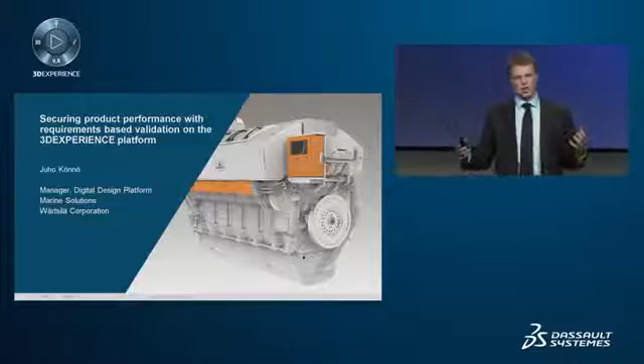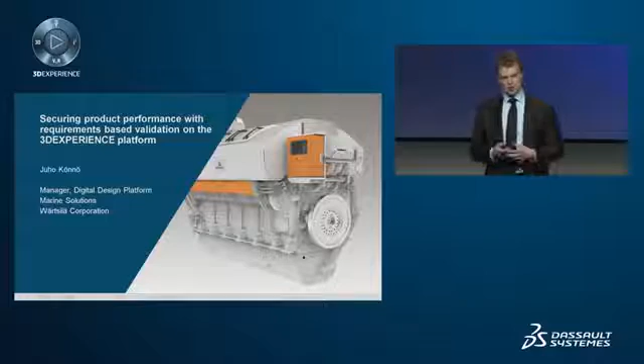Thank you, Sumant, for the kind introduction, and thank you, Dassault and Simulia, for hosting this great event and for inviting me to give some insight into what we've been doing with the platform. We're talking about securing product performance, and what do we mean by that? It's all about meeting the targets with the product design, and doing that with the minimum amount of going back and reiterating. We're going to see how we're using the 3DEXPERIENCE platform to leverage that.

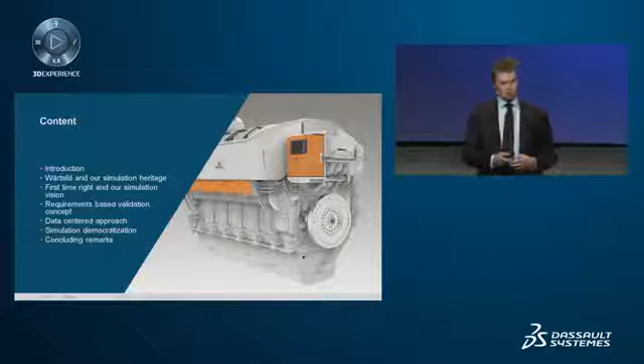So we're going to look first a bit into our company, because I don't think the four-stroke medium-speed diesel is such a mass product that you're overly familiar with. Then we'll take a look at what we actually simulate as background, so you see what kind of simulations we're working with. Then the core of this talk will be more on the requirements-based validation concept—what we mean by that, coupled with the data-centered approach—and going into simulation democratization, showing how the 3DEXPERIENCE platform helps us with that.

But first, a bit about our company. We're roughly 18,000 people in 70 countries, a technology company. We're of course known for the four-stroke engines, but our business nowadays is divided into marine, energy solutions, and services. On the marine side, we're known as an engine manufacturer, but we actually provide the whole deal for the ship—everything from thrusters, propellers, gearboxes, all the way to bridge engines. You can even buy toilet seats for your ship from us.

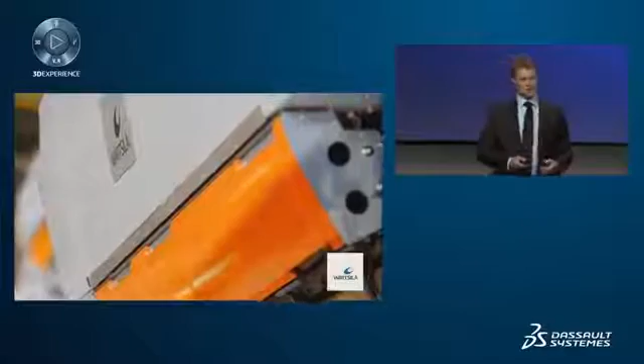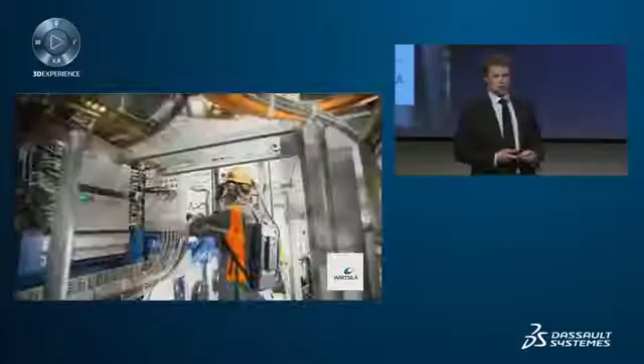Then the other part is the power plant side, or energy solutions as we call it nowadays. It used to be a lot about generating power somewhere you didn't have anything else available, but now it's transforming more into smart power generation—meaning providing flexible power for balancing grids, for example, with wind power coming more heavily into play. The third cornerstone of our operation is the service business. We service not only our own products but quite a lot of other engines too, and we have a really wide service network. That's in brief—I hope that gives a quick overview of who we are and where we come from.

Moving into the topic of the day and more into simulations: back in the 70s it was pen and paper, but already in '73 we did the first finite element analysis. In 1980 we got the first personal computers, and moving into the 90s we went more into hydrodynamic bearing analysis to begin with. Here's actually a connecting rod from '92, so there's happened quite a bit on model accuracy since those times.

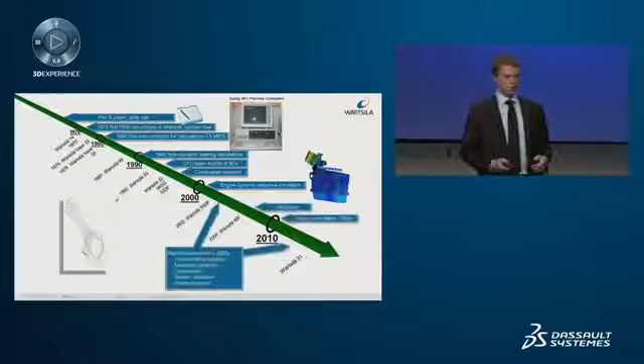Then going on to CFD, we do quite a bit of combustion CFD, for example, and combustion is at the heart of the four-stroke engine, so that's really an important topic for us. Going into the 2000s, we started looking more and more at the whole engine, and during the 2000s we've been rapidly developing both the simulation methodologies and how we apply them—going more into DOEs, optimizations, looking at large data sets, and also making the simulation methodology itself better: multi-body methodologies, advancing finite element models, CFD.

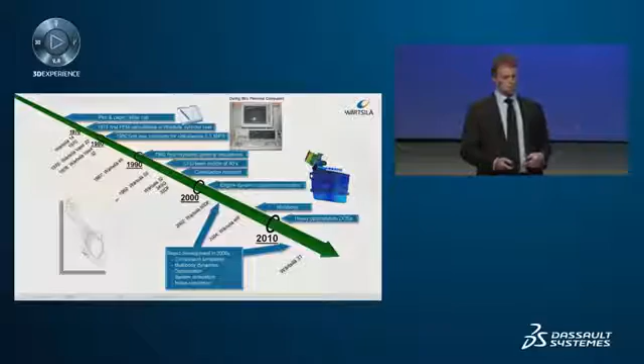What enables us to do this is the massive increase in computational power. We've been steadily investing in hardware, so with a roughly constant yearly investment, you get an exponential growth—in 20 years it's almost a factor of a million that we've gone up in computational power. Then, of course, the software cost starts to dominate, and that's kind of like the resource nowadays, I think, from the cost point of view, because you want to really make sure you utilize your software to the maximum.

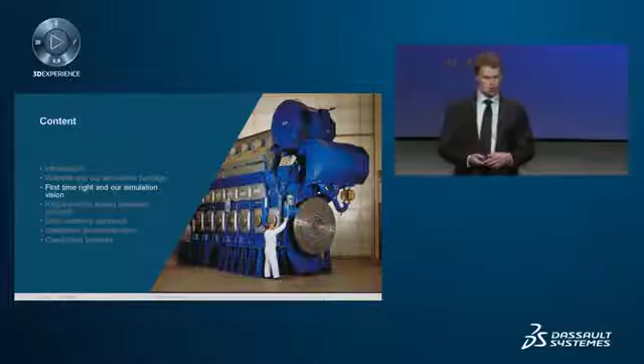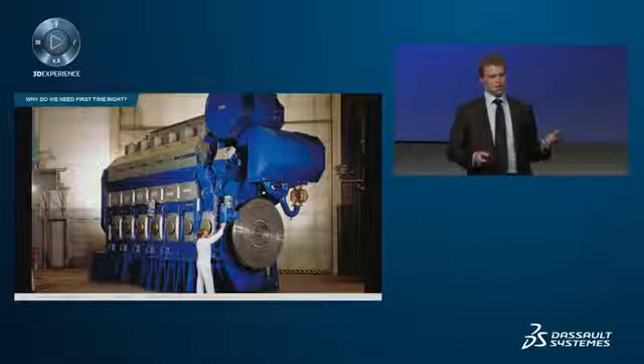Going a bit more into the actual simulations, we're talking a lot about first time right. And that's really connected to how and why we run the simulations. And why do we need first time right? I think the answer is actually in this picture. It's the sheer scale of the products that we're making.

First of all, it's of course the component cost. Big components cost a lot of money, take a lot of time to make. So prototyping, it's really expensive. And the other aspect is, of course, the testing. If you go more into testing-based validation, if you have that nice V8 engine in your car, you press the pedal, there's a small whirlpool going in the tank.

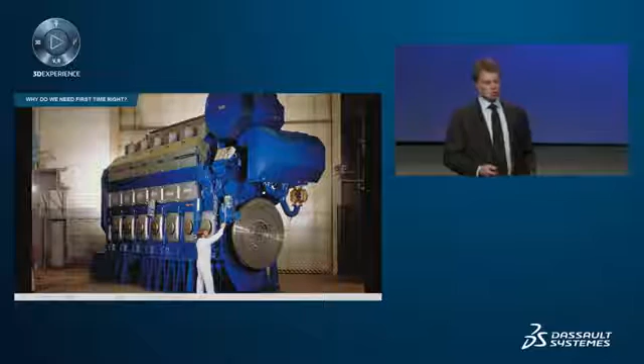Then if you're talking about something like 40, 50, 100 liters displacement per cylinder, the fuel cost is really substantial for the physical testing. So that's been a natural motivation always for us, why we want to promote the virtual testing more and more.

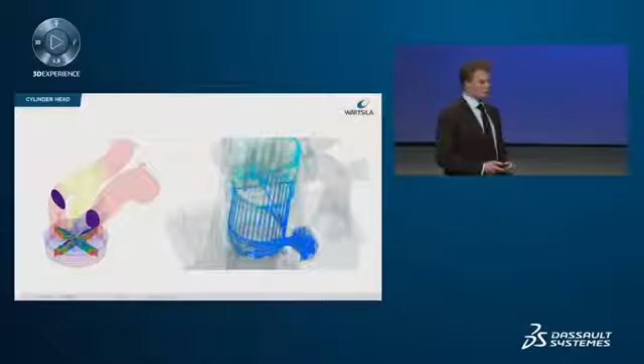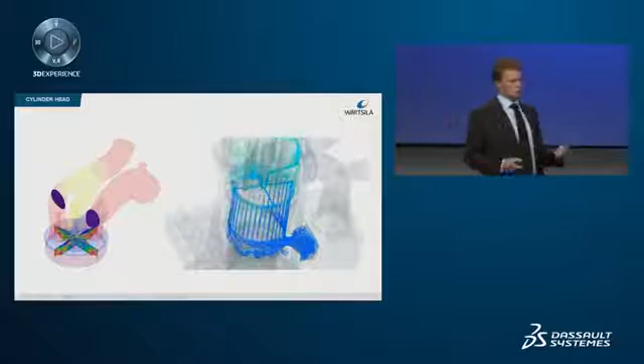Then some practical examples how we do things, and this is to highlight that we're going more and more into this kind of multi-physics setting. For example, for the cylinder head, we typically start from a combustion CFD. We go to a conjugate heat transfer for the cooling. Then from that, we take the thermal results.

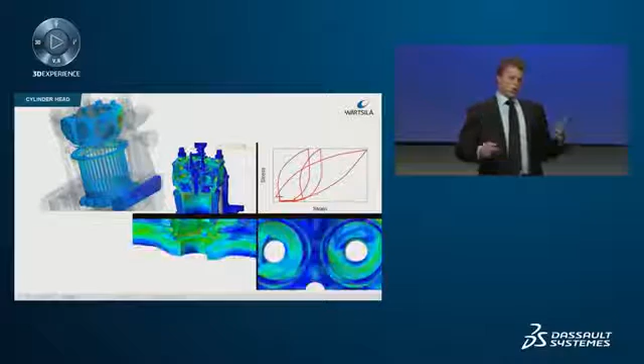We're using Abaqus here for the finite elements. We're using pretty complicated material models. We're also including more and more manufacturing effects, such as the casting effects, what the material actually is in the casting due to the cooling and so forth.

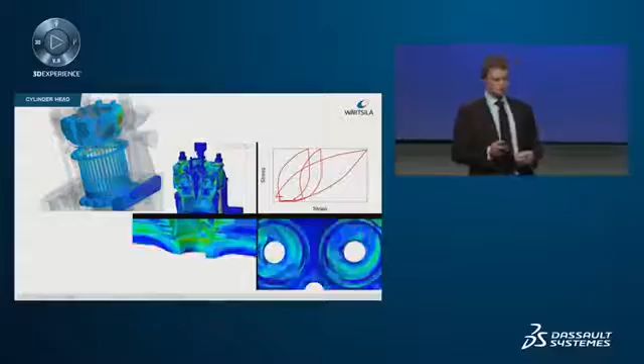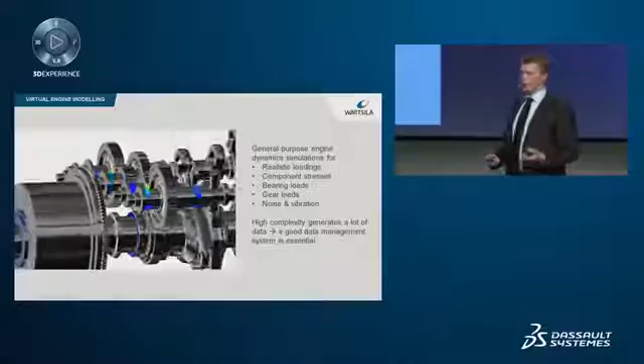Then another cornerstone of our modeling approach is the so-called virtual engine, which basically means multi-body models of the whole engine. So we try to make the multi-body model as complete as possible and to utilize that as much as possible. So it's not only for the vibrations, but you get a multitude of results out. You get oil films, you get loads for other simulations.

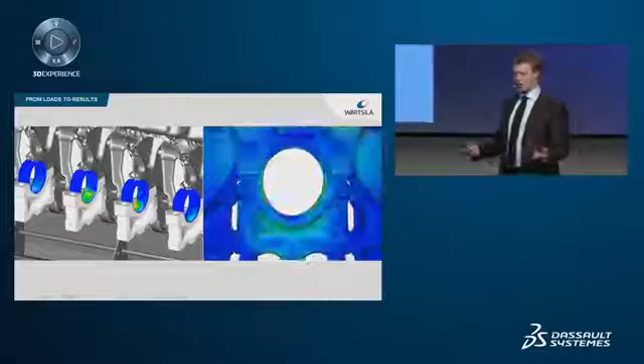And as an example of that workflow, from the multi-body model, we're analyzing, of course, the bearing results. We're taking those loads, transferring those to an Abaqus model. Once again, here we're having casting effects included, a lot of contacts. And because you have big components, the simulations tend to be heavy.

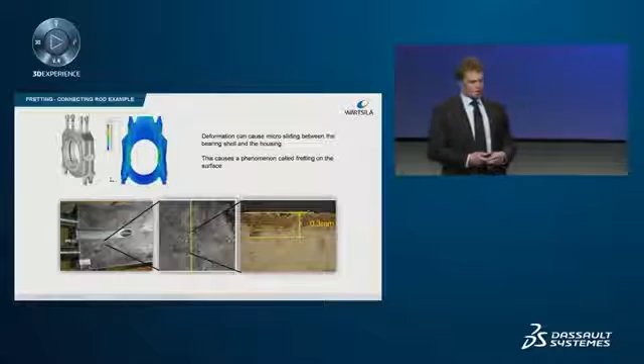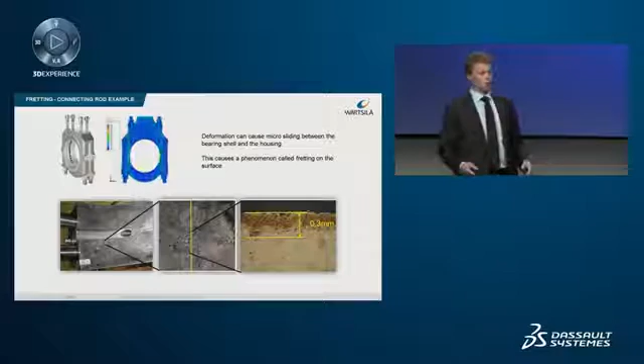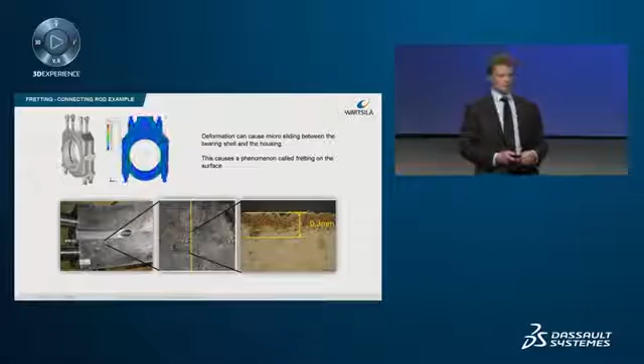And having said that, big components doesn't mean that you're not always looking at everything on the micro scale. I wanted to show this example of the fretting phenomenon, which is really commonplace wherever you have frictional joints. So here basically the connecting rod is deforming from the bottom and you get a sliding between the shell and the housing. And then with innocent-looking stresses, you can get pretty nasty-looking results.

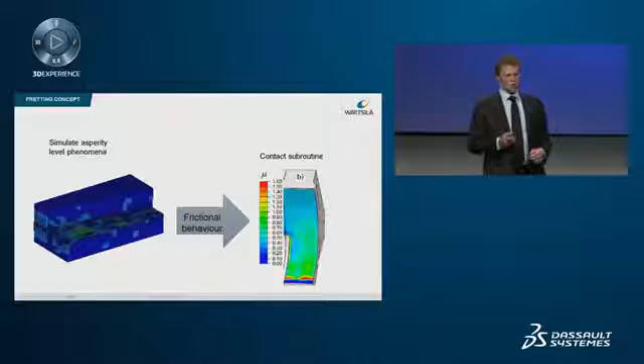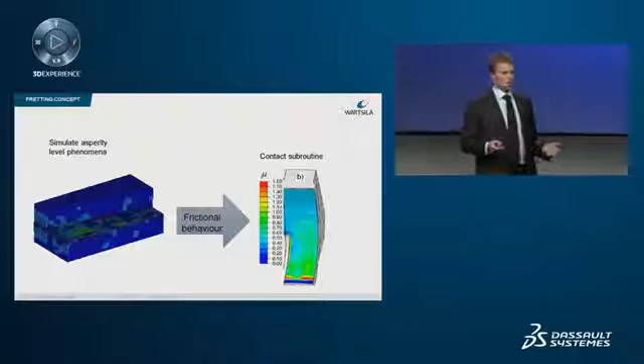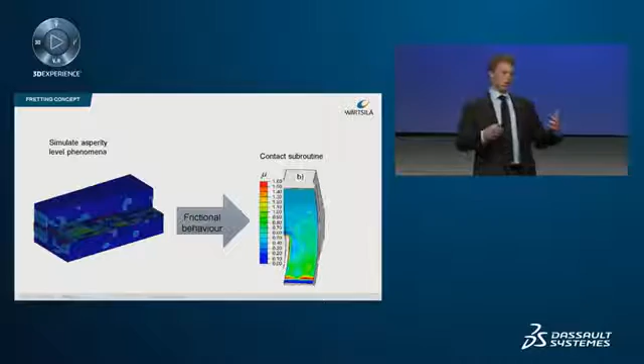And this has led us actually looking into micromechanics. And it's been really nice to see the amount of interest here going towards the multi-scale concept. And we're using here, for example, Abaqus for modeling asperity phenomena and trying to go from those microscale or mesoscale results into something that we can utilize in the analysis workflow.

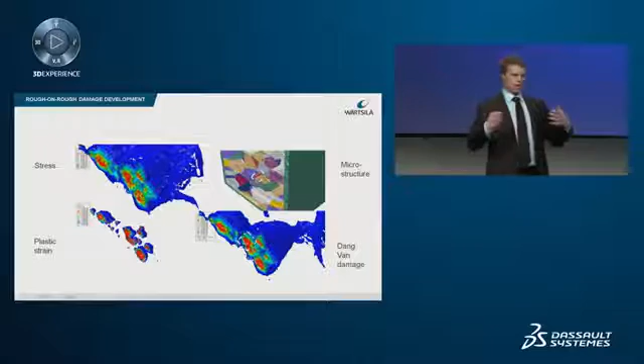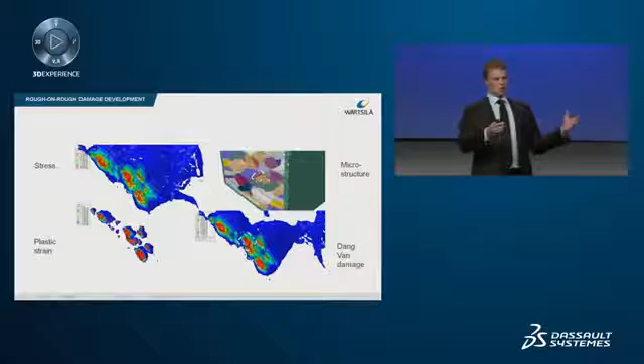And taking that bit further, we are now also modeling the metal itself on a grain level to try to understand what happens in the contact, and then try to take those to the simulations that we're actually running. And from our perspective, we're not trying to reinvent the wheel on the micro level, but our focus has been more on how do we take all of that good stuff that's been done in the micro modeling, and how do we make that into something that we can actually utilize.

So this is why we're so concerned about the requirements, because they are actually the thing that guides us into the general direction of what we are trying to do. And that is why I think it's really important that they should be always visible and accessible to everyone involved in the design process. And the other aspect is that there's a lot of different levels of requirements.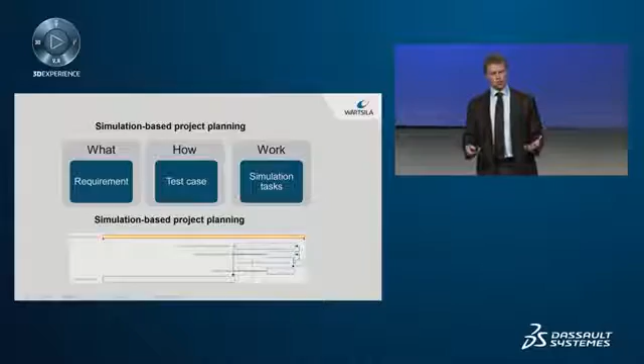In traditional project planning, you start quite often from the work. So we need to do this bit of work, then you put it into a schedule. But I think that in simulation-based project planning, if we want to call it that, we should just simply flip it over. So start from the end. And this is what's actually demonstrated here. So let's say we have a new engine development project.

And we start figuring out what to do. We know that we need to run some kind of analysis once again on the head. So you're starting with the project planning, but now you're starting from the end. So you're not starting with that item that, okay, I need to build the model, I need to prepare the CAD. But we're starting by saying that, okay, in the end, we have to do some design iterations.

But why we're putting that item there is that we are now using the platform once again to use those requirements that we have already existing in that same place. So we start from that task that is going to be the one that delivers your targets. And to that one, we're now linking, for example, the requirements. So these requirements are actually the only thing why you are doing this specific validation task. You're doing it because you want to fulfill the temperature targets.

The next step in this one is then backtracking the track. How are you going to get there? So then you figure out that, okay, typically we need to run 10, 15, 20 designs. So it probably makes sense to create some kind of simulation template, for example, in this case. And we define that as a task. In the same way, we link those tasks, so you need to get the template done before you can start on your design iterations.

And to that end, we're really trying to heavily use these dashboards as a means of reporting interactively, providing access to the data. Like we saw a similar thing in Andy's presentation, the key is that you can provide the data to a lot of people, and you also provide the opportunity to communicate or save your communication. So for example, annotate the designs, say that this is good because of that. Maybe you should be looking into this.

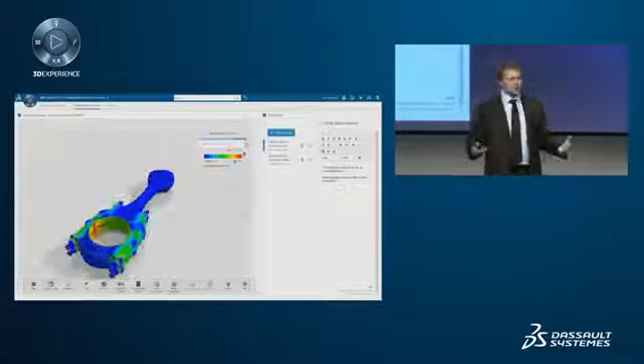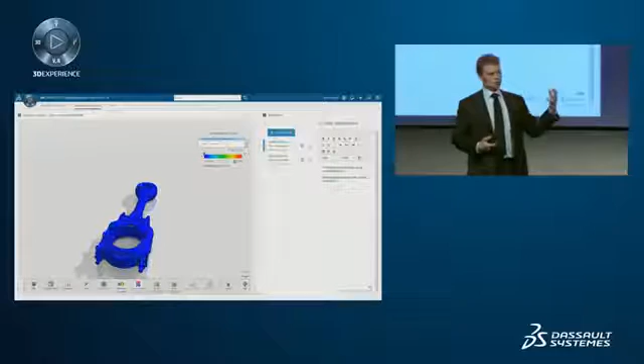And then instead of compressing, let's say, 1 terabyte of 3D data into 100 pixels, you should be really giving access to that whole 3D data through the platform. And I think one key aspect in this is as well that it all runs in the web browser. So it's really easy for the casual user to come in, start using, and get access to the data that he needs more or less immediately.

To recap in short the whole requirements-based validation concept we have going on: one of the important key features is this key figures connected parameters idea, giving the most important numbers, clearly visible, always connected, always the latest data. Then we can track the validation process smartly using test cases, so you're always seeing the up-to-date view of where we're going, what's okay, what's not. And then using dashboards, since you have the data in the platform, you can provide any user a suitable view into that data.

And this is leading into simulation democratization, which has been a hot topic for quite a few years now, and I think it's picking up more and more. Why is it so important?

This is a typical case, and even the measurements are accurate, because I happen to remember this case very well, though the timing might not be. Let's say you're designing something like a connecting rod, and the guy responsible, we call them engine experts, comes up with an idea: what would it look like if we increase or decrease the diameter by 1 millimeter? So, status quo...

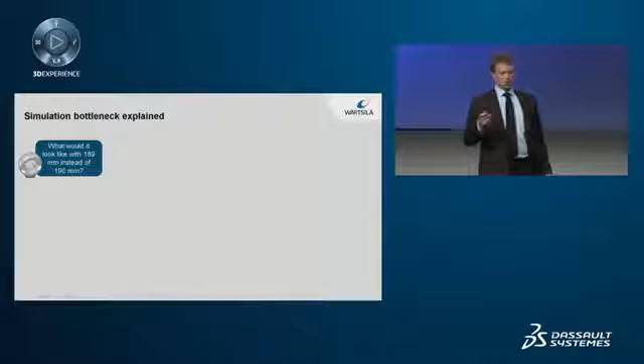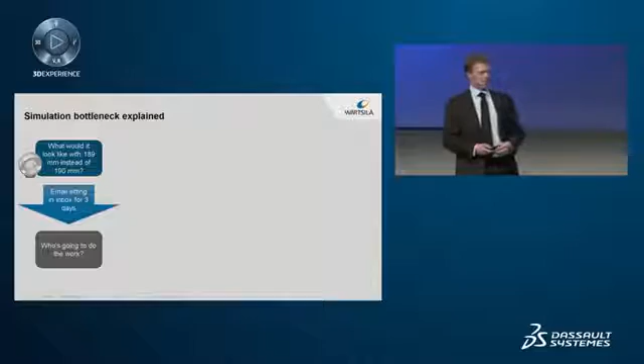What he would do is send an email to the simulation manager. The email sits in the inbox - I took the optimistic average of 3 days for this. So he figures out, okay, there's this guy, he's ready to do the work, but it's in his inbox for yet another 3 days.

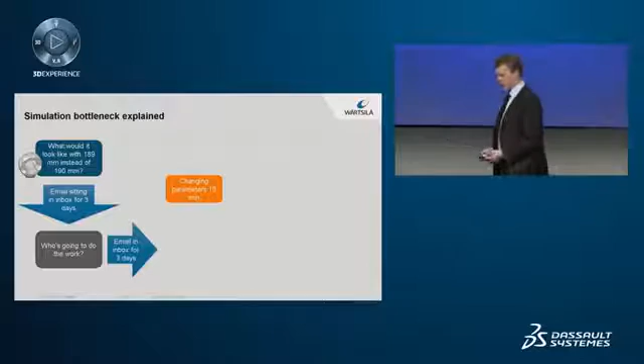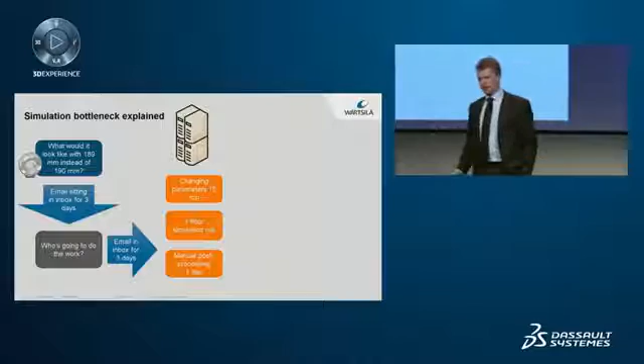Then he gets started. He has the model, maybe automated, so he changes the parameter - takes something like 15 minutes. He spends 3 hours running the simulation. Then the post-processing takes like a day - he has to produce pictures, he doesn't remember what script he used last time, etc. He has it done, he emails it back to the manager.

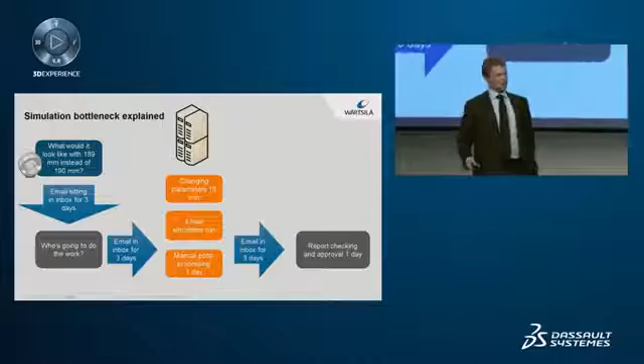3 days in the inbox, minimum. Someone's checking it - at least 1 day. Then it's sitting in that guy's inbox who requested it, because he's already frustrated - he decided to go with the original 190 millimeters anyway. These simulation guys never get anything done. But why is that? Because the simulation took 3 hours and 15 minutes, but we were emailing back and forth something like 14 working days.

But now, instead of that email loop, we're providing the template to the guy who really needs the results, giving him access to the parameters relevant to him. He can click, and then he's figuring out, okay, maybe I'll run a few other cases while I'm at it, and creates those simulation processes. Everything's happening in the web browser - a couple of minutes and he's done, and he's running the simulations.

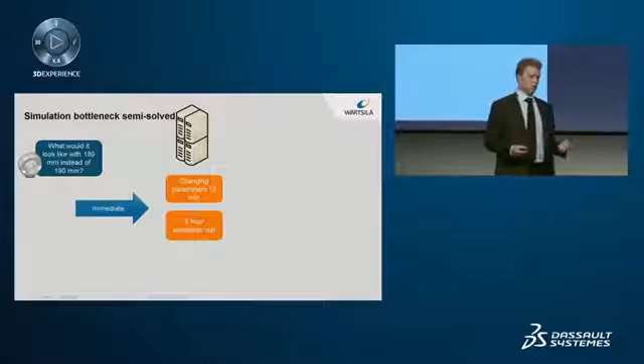But that only got us halfway through. Basically we went from, let's say, 7 working days to more or less immediate. So now we're running, but what's he going to do when the result is complete? I think this is an equally important part of democratization - providing the models to run and making them easy to run is one part, but then you need to provide the results as something usable, something that makes sense. For that purpose, I think result analytics is really a good tool in this aspect.

In this one, we're looking at the cylinder head process. It's a concept process, and we'd be running that by someone else, preferably not the simulation guy.

First step, how it's connected to the platform: like we saw previously, you can use the requirements directly. So we're setting the limit, for example, for the flame deck temperature from your requirement specification. So you know that when you're looking at the results, your limits are the correct ones - they are the ones agreed in your organization. You're not typing them, you're not selecting them by yourself. So you have traceability going back to the requirements.

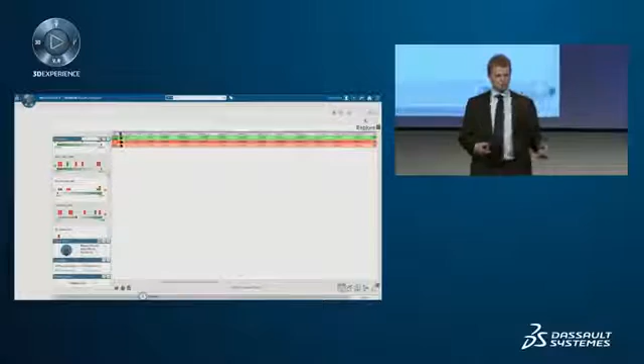Okay, now it looks like we were a bit too harsh on the temperature - we were left with only one design choice. But this is the second step: you really give interactivity to the user who needs to access the data. You're not going to be emailing back and forth the different options or updating some Excel. He can directly go and click, okay, maybe I was a bit too harsh on the temperature boundary conditions, I'm going to look at the infeasible designs as well. Then he knows these start looking pretty good, but I want to narrow it down a bit, maybe take the lowest safety factors away, and then move forward.

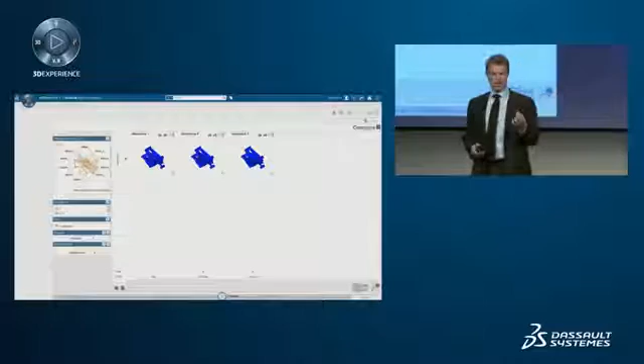And everything is happening in the browser. One important thing is that the workflow is exactly the same each and every time he's using it, so he knows that whatever data he has, he always has the same workflow at his disposal.

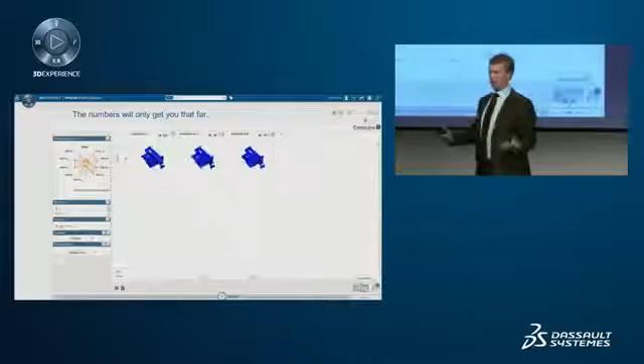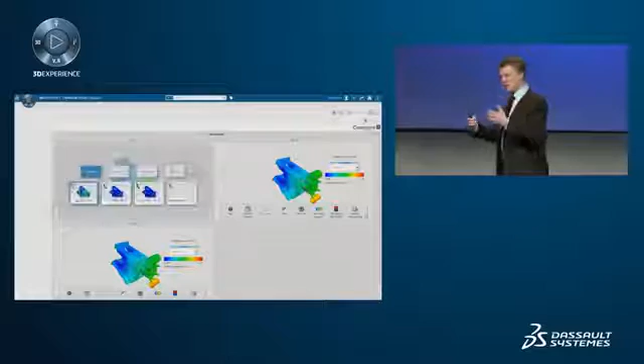You can get this far with Excel or something like that. But what really is the key here is that you can bring all kinds of content. Whenever you're comparing this parameter against the other, you find something that doesn't quite add up, and you see that there's something going on here. But now with the platform, you don't have to go find those reports and start comparing them side by side.

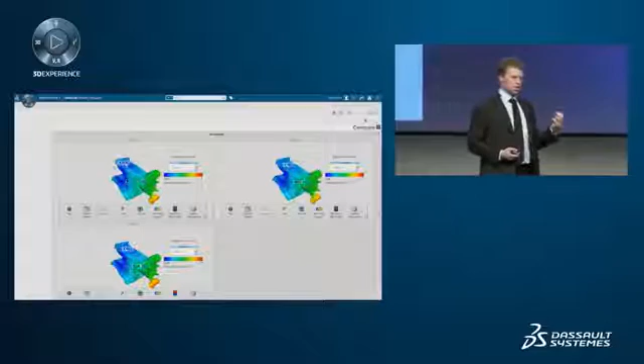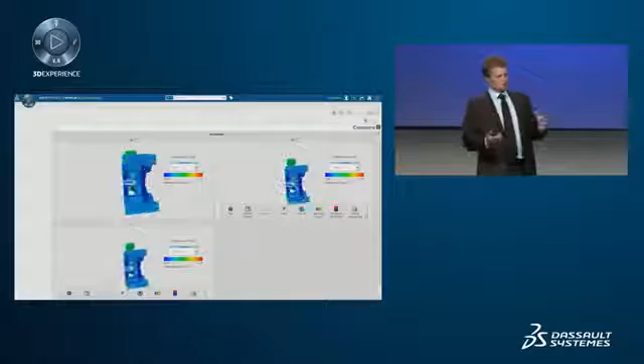In the same way as with the dashboards, you have immediate access to that data. It can be 3D like here, it can be pictures, charts, whatever. You can really drill down directly, deep into the reasons why your parametric comparison looks like this, understand it, eliminate some points that don't make sense. And last but not least is the capability to actually save your decision making with the results.

We've had a lot of skeptic faces about this like button in the company, but I think that's something you cannot fight anymore. Social media is there to stay. The whole idea here is that you're actually bringing the interactivity and storing what you did, how you ended up there, and all the reasoning.

You're saving that in one place together with the data. So no more minutes of meeting somewhere, simulation report here, some Excel here, some notes here. You're really bringing it all together. Then when you need to go back five years later and figure out what was wrong with the validation, you'll know you can find those results, the models, and most importantly, the reasoning behind why we did it like we did, and hopefully learn from that for the next round.

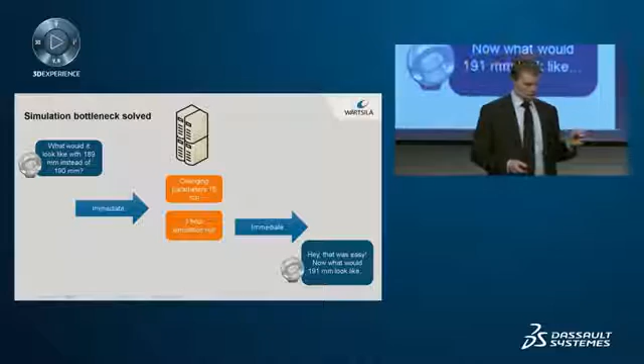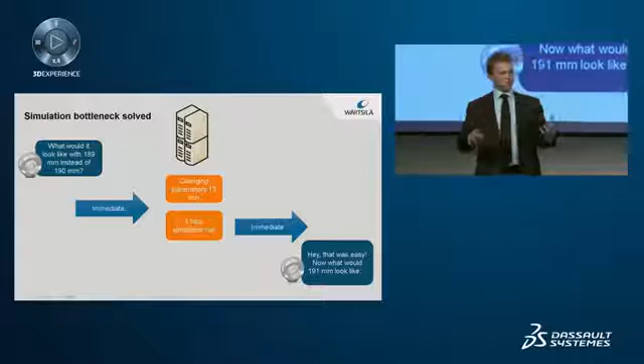So then we've solved the right-hand side too. This is, I think, what my vision is to convey to the end user of whatever you're democratizing: that when he's done, he should have the sweet taste of honey in his mouth and be waiting to do the next one. So that is really something that drives it, I think.

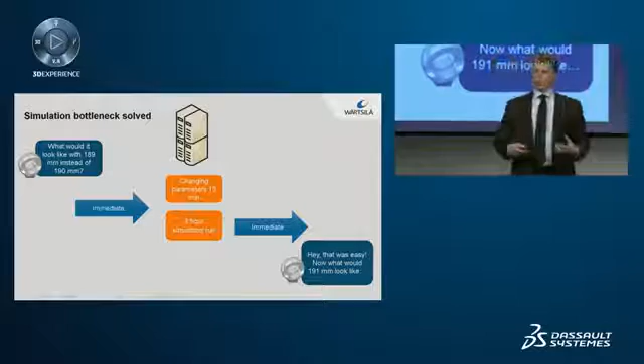When you get one person using it, the next guy sitting next to him starts thinking, why can't you do something like that for us? And then it starts naturally spreading. So you need to get a few good examples out there. I think that helps adoption quite a bit - you take something that works, show it, get it out there, and people start getting ideas about doing this in their own case.

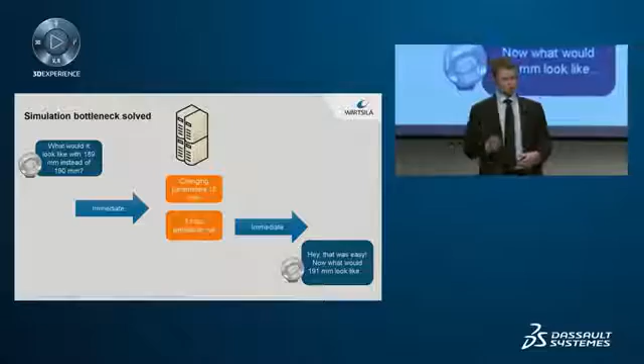Related to that is of course the planning. You need to plan how to get there, and here too I think reuse is the key. The first time around, it's a huge undertaking to really plan the simulation. But if you do it smartly, connecting it directly to the processes, you're actually templatizing the whole simulation workflow on a task level, not just on the process level.

And last but not least is the data. The target in our implementation is always to be directly connected to the data. You remove the man in the loop in those cases where it's an extra effort, and by providing access to the data, you put the human where he's at his best. You give him the data, you give him the tools to interact with the data and to support decision making.